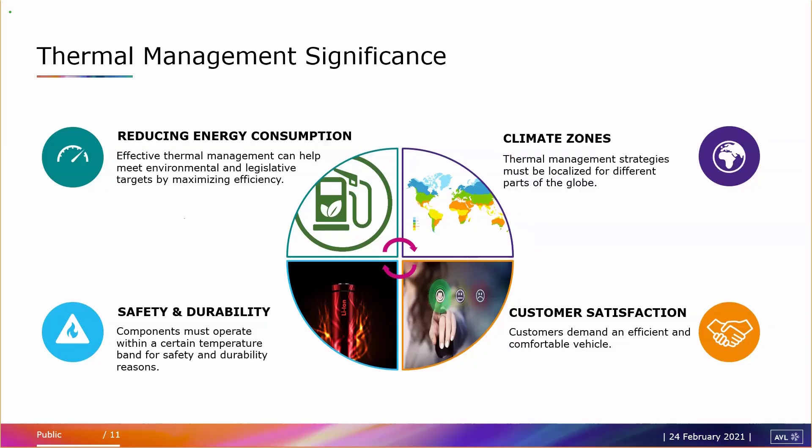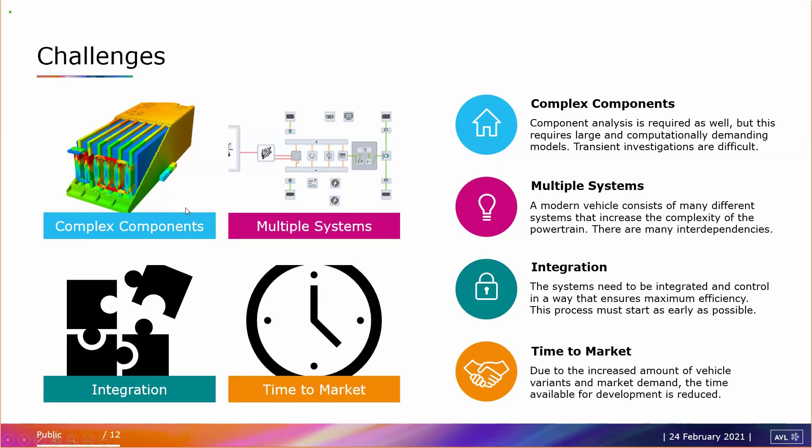So what are some of the challenges that we are facing when we are developing a thermal management system? First of all, the components that are part of the powertrain system are very, very complex. This means that most of them have to be analyzed not only in a system level, but also in a component level, which usually requires very complicated experimental setups or very complicated simulation models. This means that in the three-dimensional and testing environment, transient investigations are very difficult or very expensive.

Another problem is that a modern powertrain is quite complex. So there are many more systems in the vehicle than there used to be 20 years ago. Just compare, for example, a 30-year-old car to a modern hybrid. There are many more systems in a modern car. And of course, this means that we have to take care about the integration of these systems.

Only a completely and optimally integrated multitude of systems will operate at maximum efficiency, and this means that we have to take care of the integration as early in the development process as possible. Only this way we will end up with a satisfactory result.

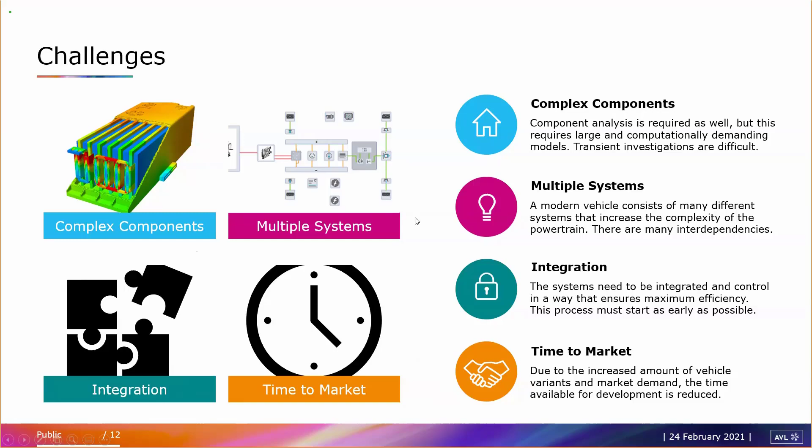And last but not least, due to the increased amount of vehicle variants that OEMs are producing nowadays, also the time to market is constantly being reduced. This means that we have to, of course, rely on simulation and perform some of the development already in the virtual environment. Let's have a quick look at the typical thermal development process.

So in the first step, we have to come up with a list of requirements. So we have to ask ourselves questions such as, what will the vehicle be used for? So for example, the application of a high performance car and a pickup truck will be severely different. And this also means that we have to define the use cases where the vehicle will be used.

So for example, if you're driving at a low velocity, towing a trailer uphill, you will only have a limited amount of cooling air available as compared to, for example, a vehicle that will be used to drive fast around the track. So the boundary conditions here are completely different.

We also need to take care of the powertrain topology. So we have to know which components will require active cooling, active heating, and this way we can come up, of course, with a list of components that need cooling, with a list of components that we need to purchase and integrate into our system. And last but not least, we also need to take care of the climate conditions. So we should have in this first step a list of thermal requirements.

In the next step, we try to develop a concept of our thermal management system where we evaluate different topologies. So we basically have to come up with a system that fulfills the conditions imposed onto us by the design team. So maybe some concepts would work, but due to packaging issues, you must change them, you must modify them. Here you can also already size the components.

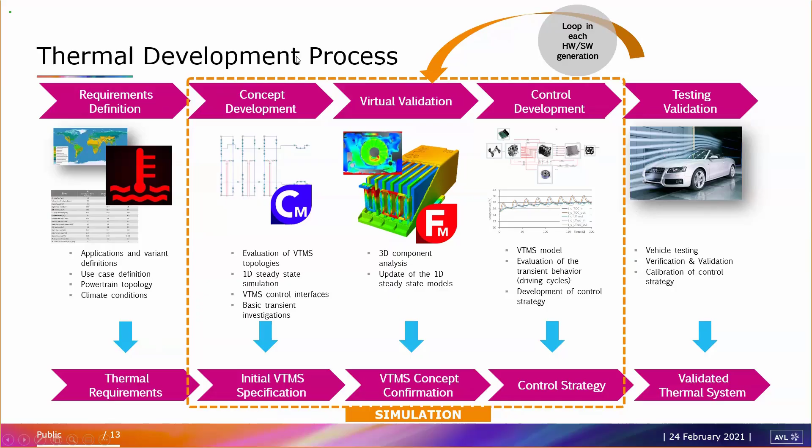But the bottom line is that the simulation, at least in these three central and integral steps of the thermal development, is a very good asset. So you can save a lot of time, you can save a lot of money, and most of the development can be front-loaded, so you can perform it much earlier in the development process and you don't have to wait for the prototypes.

Next, let's have a look at some types of simulation that are available and that can help us in the thermal development process. So generally, we distinguish between two types of simulation here. The first one being the component simulation. So these are various CFD and FEM codes. They're highly accurate, but since we are here really dealing with very complex geometry that requires very large meshes, they're very computationally demanding because of that.

And for that reason, one has to be very careful when devising a simulation plan. So most of these components are too complex to be really investigated in transient operation, and in order to have a good coverage of the simulation plan, you need to very carefully define the steady state points that you're planning to investigate. But they are very suited for detailed component investigations so that you can, for example, identify hotspots in some parts of the components and so on.

On the other hand, we have system simulation, which is very tailored for system integration and optimization. So you have a much lesser physical complexity of the models that you use here. This, of course, means they are much faster. Most of them will run under real-time factor 1, so they are faster than real-time, at least in most cases, which means that the simulation times are really much, much shorter than in component simulation. So here you can run tests that are several hours long in one afternoon, or even several scenarios such as that overnight.

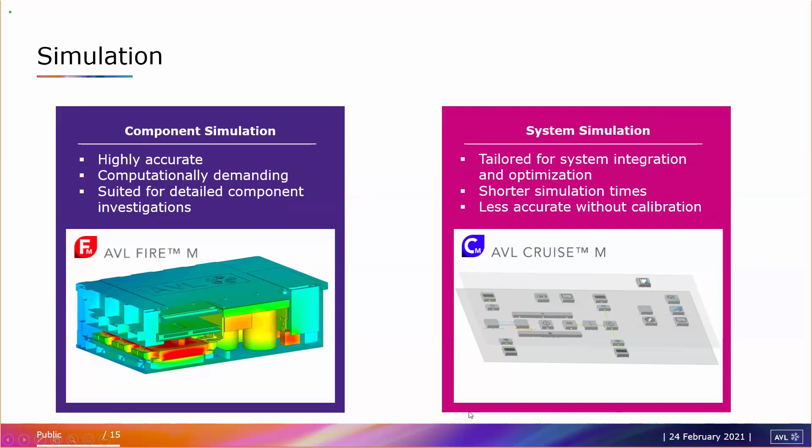And in this webinar, I would like to talk you through a use case that we've developed in AVL CRUISE M, which is our system simulation code. And the use case will be addressing a battery electric vehicle VTMS simulation. So if we think of a typical battery electric vehicle nowadays, there are several systems that we need to consider if we want to get a clear overview of the thermal behavior of the vehicle.

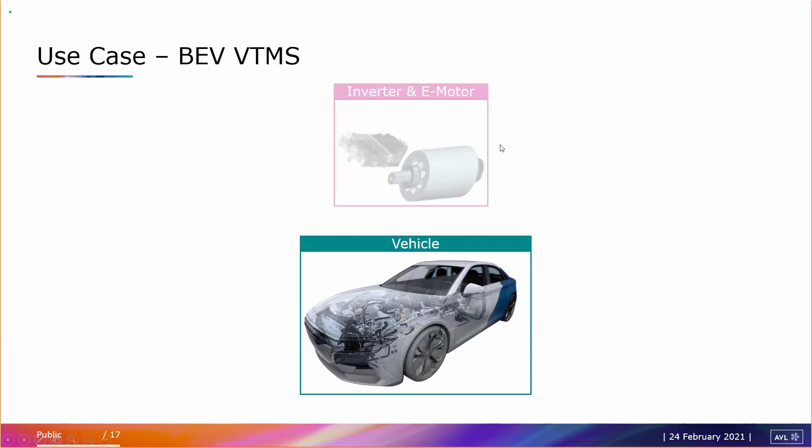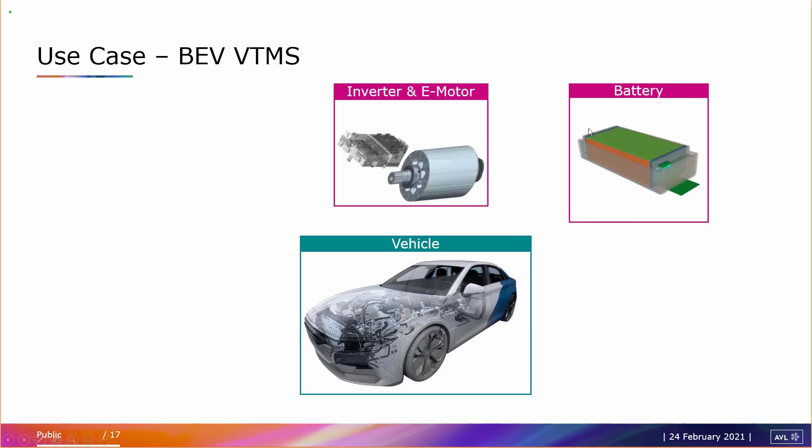We have the electric motor, so this is kind of the core component. Of course, it comes with an inverter and also some other power electronics. The battery is also a very important component in a battery electric vehicle. And these components require some kind of cooling. So usually we have liquid cooling, but it could be air cooling. And very typically, this is also assisted by the refrigeration cycle.

So we have the air conditioning system, which of course can also assist the cooling. So I'm talking about battery chillers. This can also work as a heat pump, so it's also a very important system that we need to consider in this day and age.

Finally, we also have to take care of the cabin in the vehicle model, if nothing else. So maybe if we're not really planning on doing a very detailed HVAC study, we need to at least consider the power load on the refrigeration compressor and other auxiliaries here. So this is also one of the systems that should not be neglected.

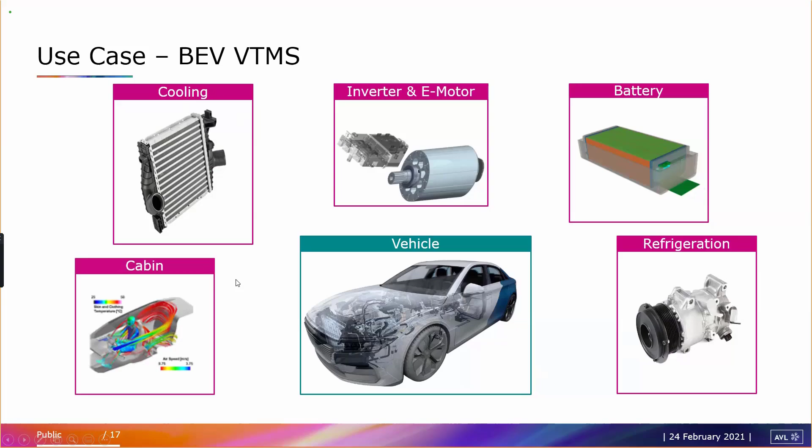And in the next slide, I would like to present briefly such a model in CRUISE M. There are too many details in this model, so I will just present some basic interactions and some highlights. But of course, there is a webinar series on the AVL website where some of these systems are explained in more detail that you can look up on the website in case you're interested.

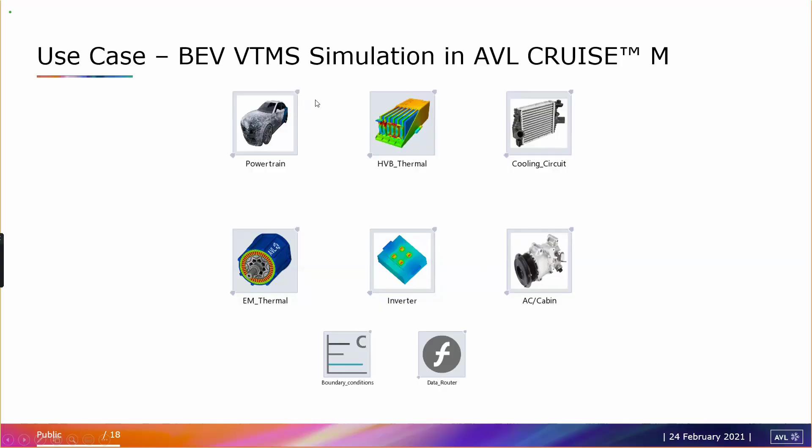So this is one of the installation models we have in CRUISE M, and our users can have a look at it. And let me now guide you through the model quickly. So first of all, we have the powertrain. This is the core of the model. In here we define the drive cycle, we define the driver parameters, we define the transmission ratios and losses, the vehicle dimensions, the wheelbase, and similar things. So this is really the core component.

And in it, of course, we also have the electric machine, the battery, and the inverter characterization. We also need to consider the thermal model of the battery. So the battery pack, as we all know, is huge, and also one of the most interesting components when we are talking about thermal investigations in an electrified powertrain. We also have the electric machine thermal model, and we have the inverter thermal model.

So all of these systems, the battery, the electric motor, and the inverter, they are all just lumped masses networks. So they're simplified accumulative models that we use to investigate the heat transfer phenomena in the vehicle. As already mentioned, these components require cooling, and this is done with a cooling circuit. So in here we model the flow of the water glycol mixture, and we also have a subsystem where we consider the air conditioning, and we also calculate the cabin temperature here.

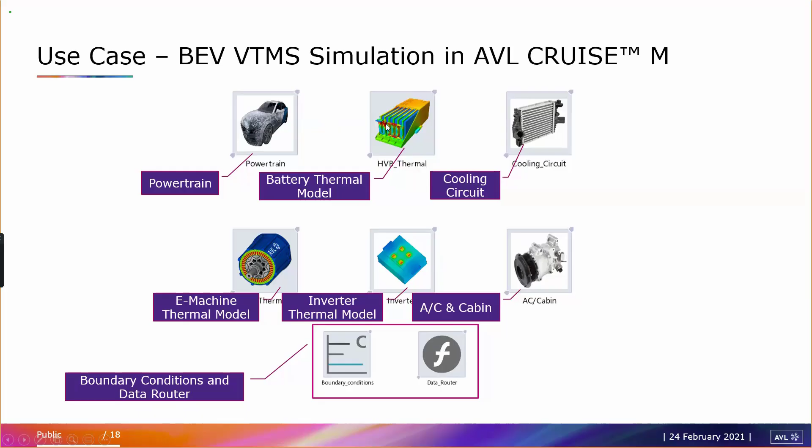At the bottom here we have two components. One is called the boundary conditions, and in this component we basically define the ambient temperature, ambient pressure, ambient humidity. So basically things that provide the ambient conditions, which will of course also have an impact on the thermal behavior of the vehicle. And we have the data router. This is simply a component that we use as some kind of a signal hub that sends information or signal buses from one subsystem to the other.

So I will now briefly present some of the basic interactions in the model. As already mentioned, in the powertrain, we also have the parameterization of the battery pack characteristic, of the inverter characteristic, and of the electric machine characteristic. And based on the operating point of these components and the temperature of these components, we will receive some kind of a power loss that we can pretty much directly translate into heat loss for, first of all, the battery, then for the electric machine, and also for the inverter.

And the thermal models of these components will then calculate the temperature of these components. And this is something that we are sending back to the powertrain model. And these are then the temperatures that are used to determine the battery power loss, the electric machine power loss, and the inverter power loss. So it's kind of a closed loop system here.

On the other hand, of course, we need to provide some kind of active cooling to the battery, to the electric machine, and to the inverter. And this is done in the cooling circuit. So in the cooling circuit here, we basically only simulate the flow network of the water glycol mixture. Of course, we also have the pumps. We have several different valves modeled, and there is also the cooling package.

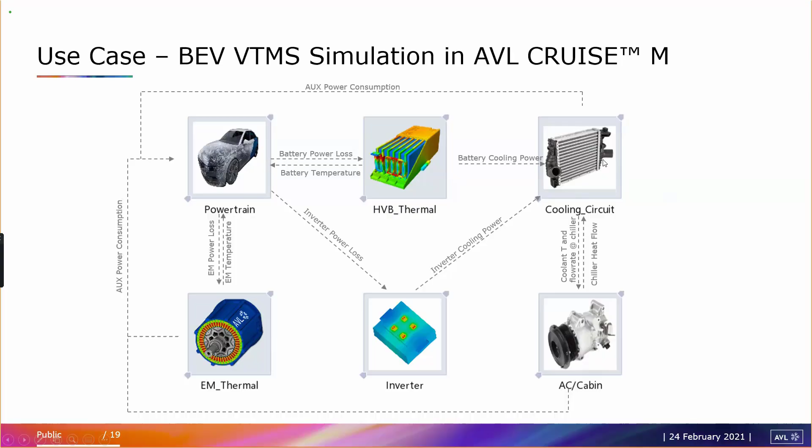Now, as mentioned, there's not time to go into too much detail here, so I would just like to show some highlights of this model. And first, I'd like to present the cooling package. So the cooling package is basically a component that we've developed to enable the user to simulate the overlap of various heat exchangers.

So this is quite a typical constellation in any type of vehicle, really. Usually you have several overlapping heat exchangers in the front of the vehicle. So you can have, for example, an air conditioning condenser. Then you maybe have some kind of an intercooler, and you also have the main radiator. And this is an assembly that can be modeled in this cooling package component. And the airflow in it can be considered either as a mass flow or as velocity.

So if you have some kind of CFD data available of the cooling package, you can simply map the velocity field in the shape of a 2D map. Segmentation is defined by the user. So if we have a look at this image here, when we see these full and dotted lines, these are various cells in the heat exchanger that you can consider, and you get some average results for each of these segments. But of course, this is arbitrarily definable.

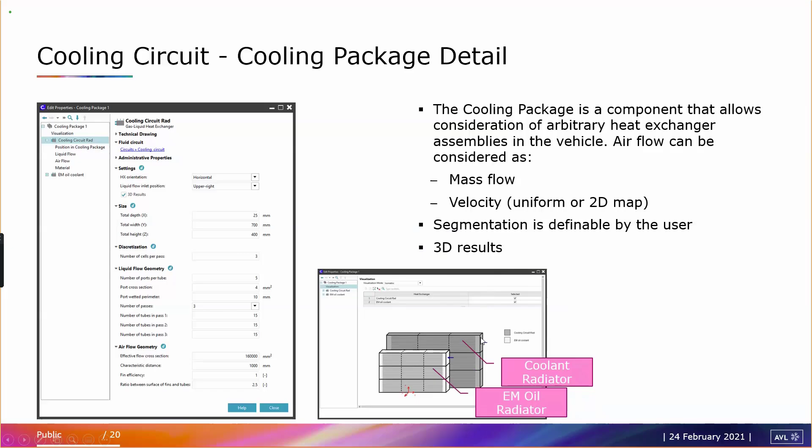We also output 3D results, so you can have a look at that in a more interactive way, which is of course much clearer than simply looking at a bunch of curves for each of these segments. Now this is a feature that is very handy and helps you spot some issues with the design in the concept phase where maybe you don't have any CFD data, or when you're really trying to investigate if what you have in mind would work at all. Of course, you can later parameterize it with actual data that you have, but this is especially useful in the concept phase. I would now maybe give you a short online demo of this component.

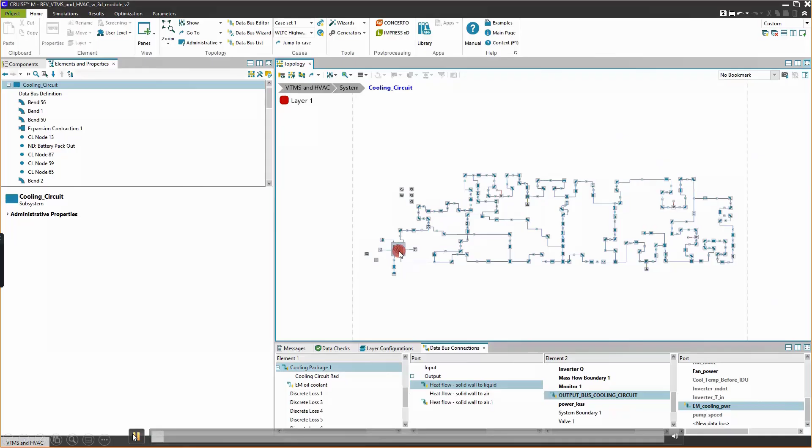So here we are in the cooling circuit. This is what I've previously already mentioned. This is where you calculate the flow and temperature of the coolant mixture. And this is then the component. It's part of the cooling system model as mentioned, and you can choose between the mass flow and velocity definition. There's also a neat visualization that helps you understand the heat exchanger.

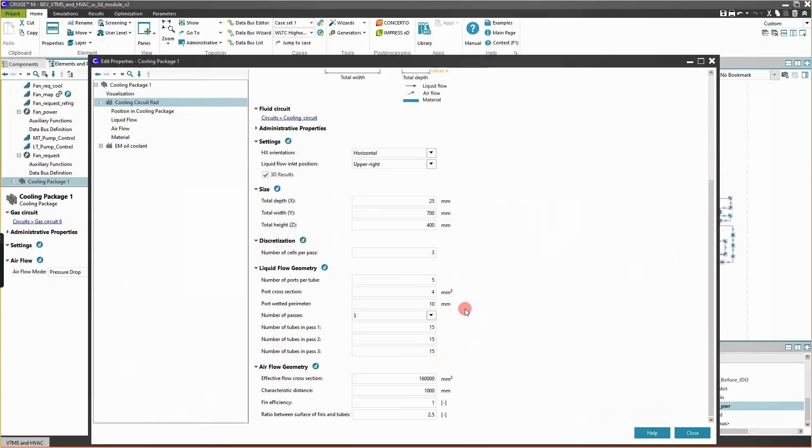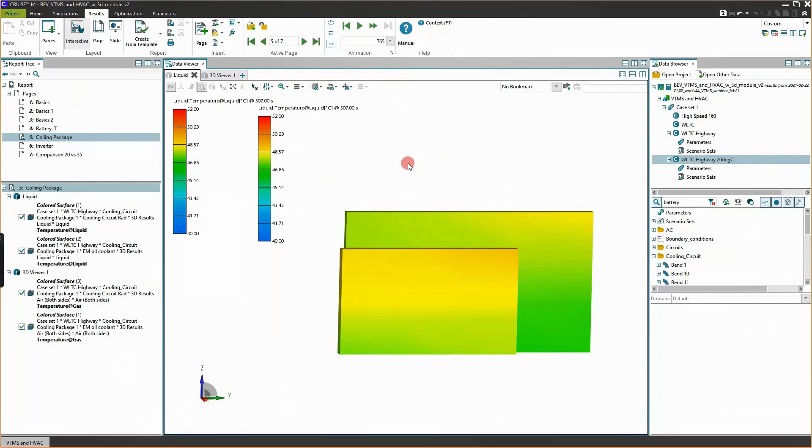We have the technical drawing that will guide you through the process of parameterizing the components. So you basically have to define the geometry of the heat exchanger, and you need to take care of the friction data for the air and coolant. As mentioned, there are also 3D results, and after the simulation, you can then have a look, for example, at the temperature distribution in the liquid. Okay, so this was a brief overview of the cooling package, and next up, I would like to talk you through the details of the battery pack thermal model.

And the nice thing in CRUISE M is that you only have to do this once. So you can model only one module, and the rest you can simply copy as a link. And if you then apply changes to the first module, this will automatically also be reflected in the rest.

And in return to the cooling system, we simply provide the sum of the heat flows that occur between the individual battery modules and the coolant passing through them. So this way we can then calculate the outlet coolant temperature from the battery pack also in the coolant system model. And of course, we also consider some convective heat transfer to the ambient.

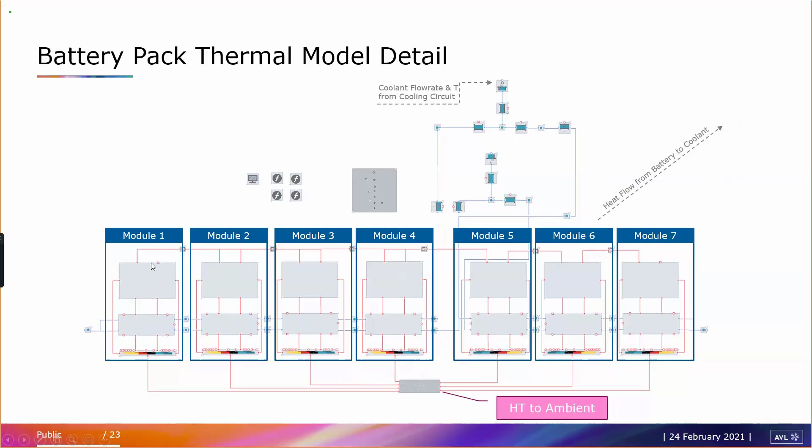Now let's have a look at the details of a single battery module. We have, as already mentioned, the coolant inlet and the coolant outlet. So this is a segment of the cooling plate that applies to a single battery module. And this is then, of course, connected to a segment of the housing. So this is where the cooling actually happens.

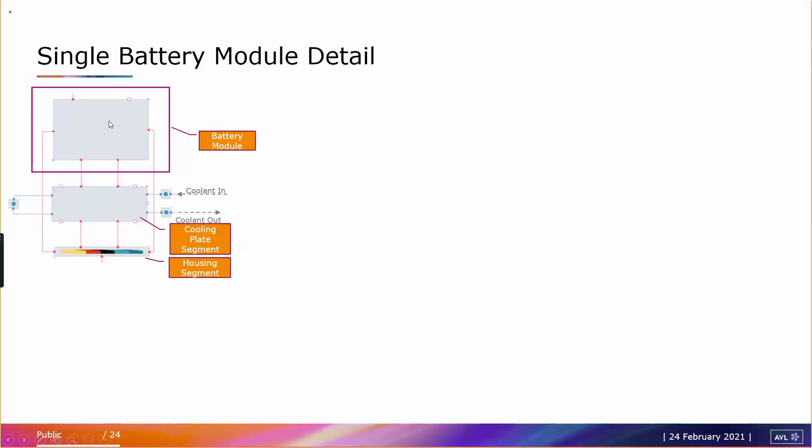Also, this battery module is a subsystem. Let's have a look at some of the details here. This is what it looks like inside. This is the battery cell, but I will talk about it a little bit later. On top, we have the bus bars, which are represented by a couple of lumped masses. These are used to calculate the temperature depending on the sum of all heat flows coming in through the thermal ports. We have the end plates of the battery module here and here.

And here on the bottom, we have the heat transfer to the cooling plate. So the connections that we see here on the left are connected to this part here. This is where most of the cooling of the battery actually happens, as we will also clearly see later on. The battery cells or the battery module are represented with a three-dimensional discretized solid.

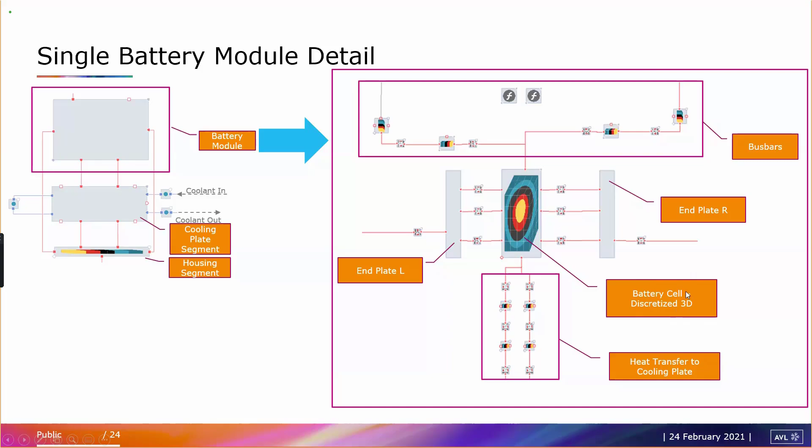And I would like to now talk about this component. It's basically a freely definable component that is used to simplify the process of building thermal networks of batteries. So imagine you have a battery module that includes dozens of cells, and if you wanted to consider each of the cells or at least groups of cells individually, you would have to construct quite a monstrous thermal network consisting of dozens of solid masses or lumped masses and even more thermal connections. And this component simplifies this process.

So it's a component that you can use, especially for geometries such as the battery module or a battery cell, to simply discretize it into several smaller cells. And these cells will then automatically take care of the heat transfer between them. And the nice thing is that you can freely define the size of these cells. You can arbitrarily define heat ports and heat sources.

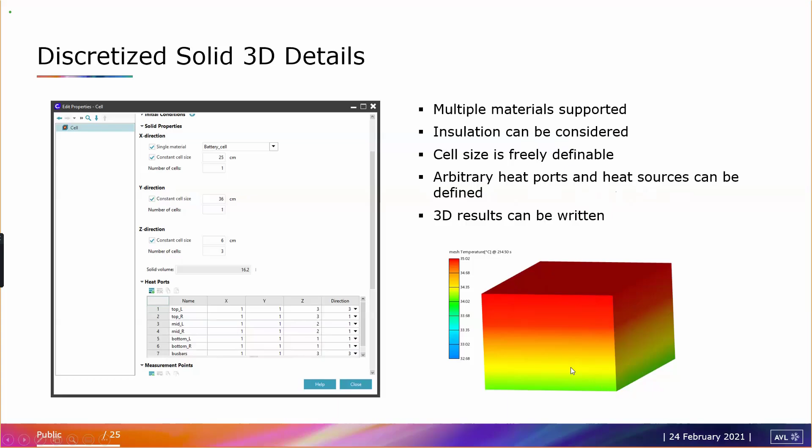You can consider insulation, and 3D results can of course also be written. And then you can really get a nice overview of what's happening thermally in the component. So again, I would like to show you an online demo of the component.

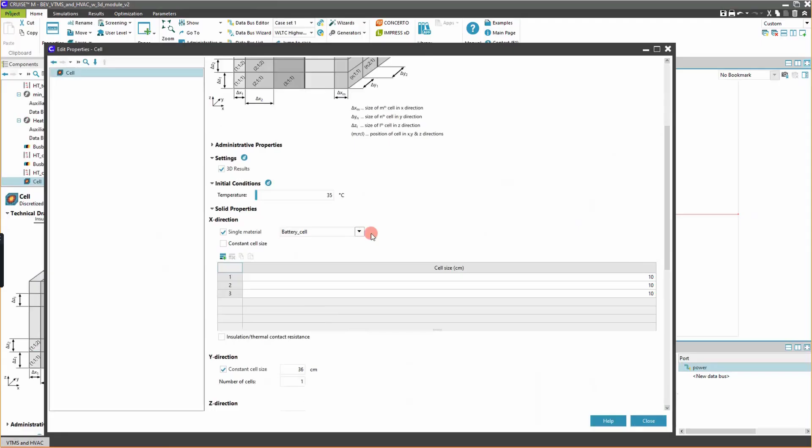So that's the component. And again, we have a tech drawing that's helping us understand what it is we're doing. And as mentioned, you can choose different materials. You can even define your own. The cell size can be constant or not. And you can even consider heat contact or heat resistance between the contacts.

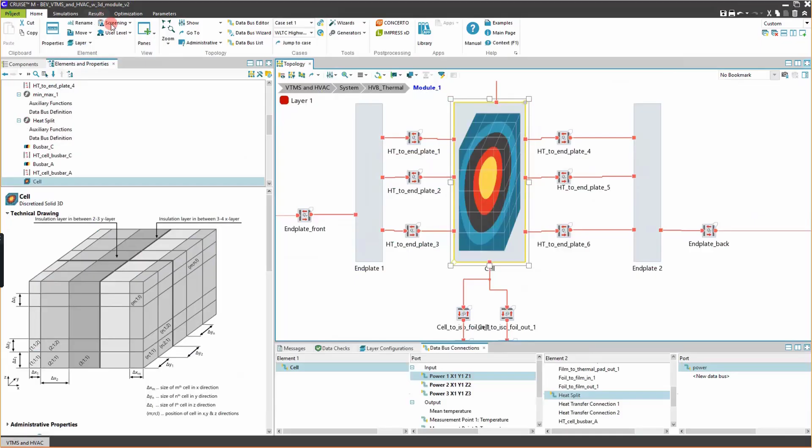Arbitrarily, you can define heat ports, measurement points, and external power sources. So these are the heat ports that we have previously defined. You can use them to connect the component. And in the end, we also, of course, get some kind of a 3D result, and we can plot this result for any time step in the transient simulation.

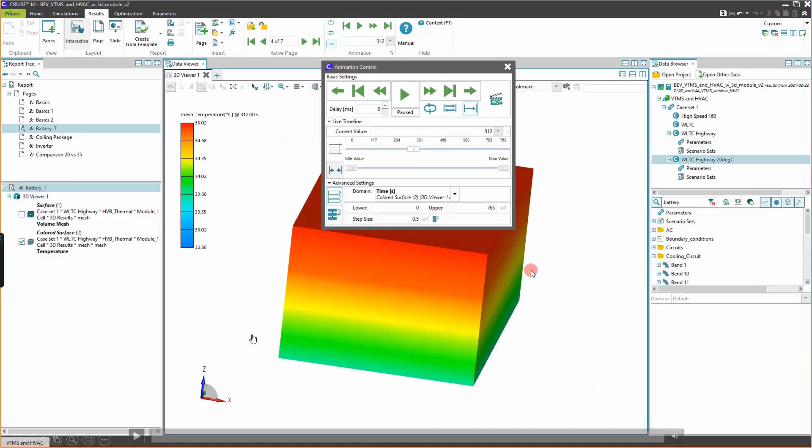And by looking at this green color here, of course, we can clearly see that the cooling plate here is mounted to the bottom of the component, as we've previously already seen. Okay. So that was the discretized solid and the battery modeling approach. And one of the components that also needs to be considered is, of course, the inverter.

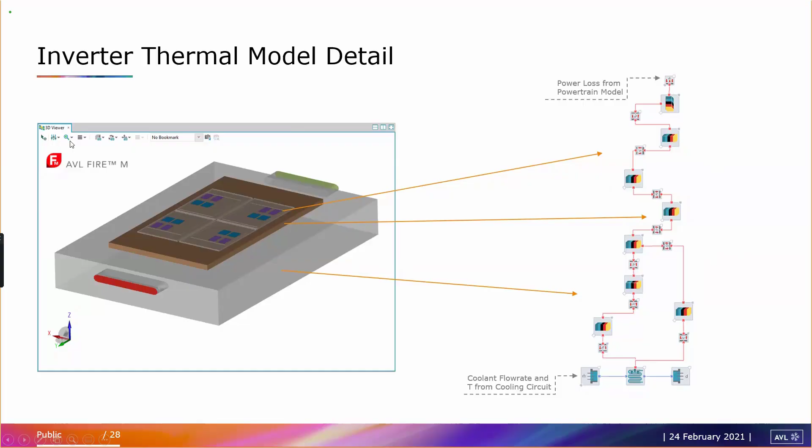So we're receiving signals from the cooling circuit, and of course then we are bringing the heat flow back in order to calculate the outlet temperature of the coolant. And in this model here, we can then get a comprehensive overview of the temperatures in the inverter. Now, of course, you might wonder what's the easiest way to transition from this model to this model. And with our software solution, it's very easy.

We have a feature that's called the thermal network generator, and it allows us to transition from 3D to 1D or 0D physics-based modeling pretty much automatically. So considering there is already a three-dimensional model available, you can use AVL FIRE M. So this is our CFD code. You can use it to perform a thermal investigation of the component in question.

You can choose different selections in FIRE M, and these are certain parts of the geometry. You can specify also the heat transfer connections between several parts of the component, and FIRE M will then automatically identify these components, connections, and also material properties. And here I'm talking also about, for example, the coolant flow rate, the initial temperatures, the material properties, and so on.

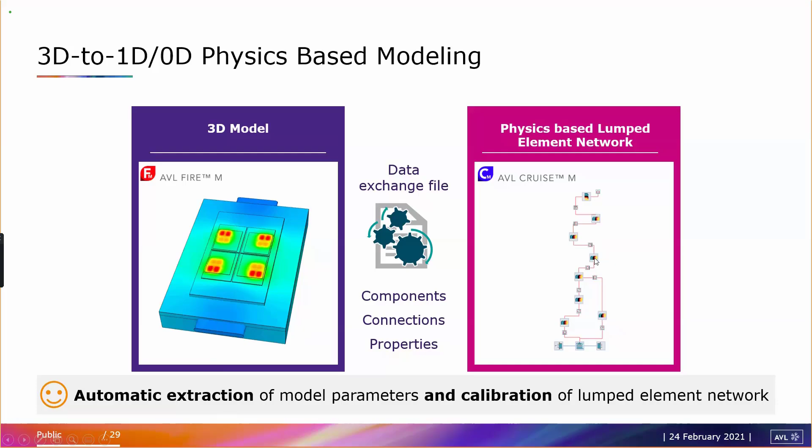And it will then automatically, it really takes only a couple of clicks, generate a data exchange file that you can then automatically import into CRUISE M and generate such a model. So most of this process is automated, and the model you end up with will be calibrated. This means that it will give pretty much the same results as the one that Fire will give. So of course there will be some discrepancies, but they're very, very small.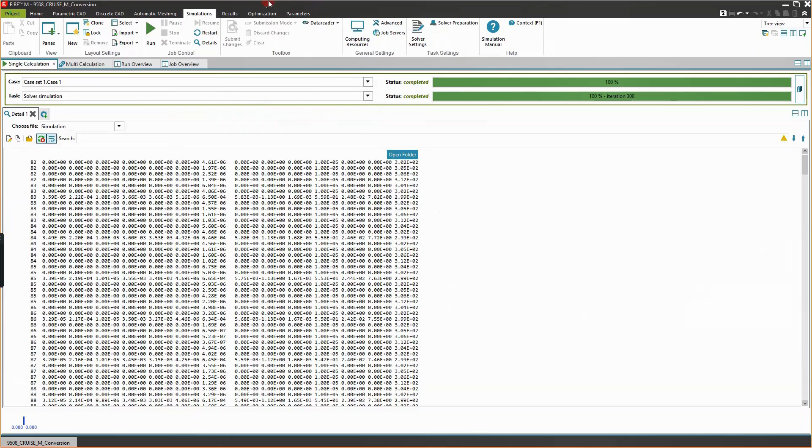Again, I would like to show the simplicity of this solution in an online demo. So here we are in FireM, where we can activate the generation of this file by simply loading the global formula. And after the simulation is completed, based on the available results, we will generate the previously mentioned file. And in CRUISE M then, by using the thermal network generator, we can simply load this file.

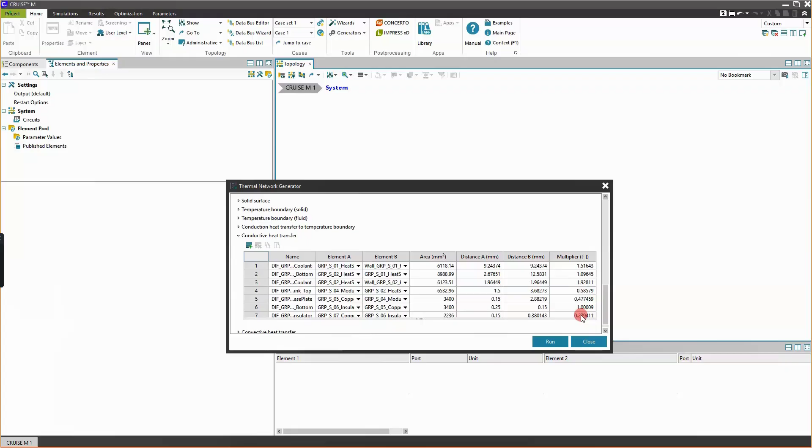And you can inspect what's being imported, so the liquid properties, the solid properties. You can, for example, add arbitrary heat flow sources, change the material, or change the mass of the component. You can also inspect heat transfer data and even change it. And after clicking on Run, the model will then appear within a couple of seconds. And this is then the model that you can pretty much use and integrate into the system simulation model. So in the system simulation model, what are some of the results that we end up with?

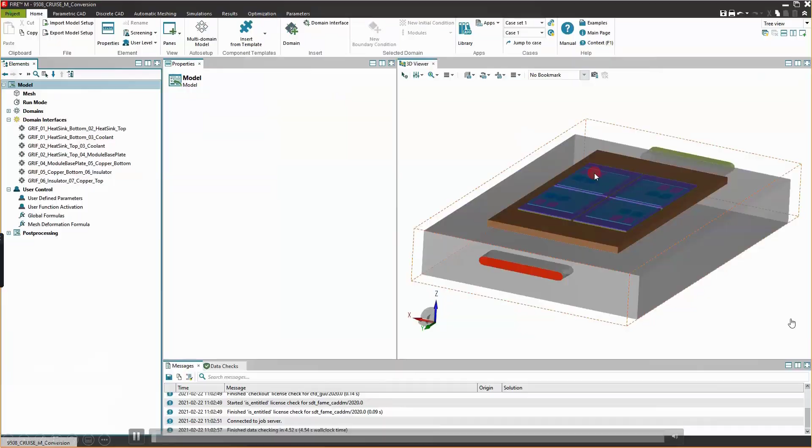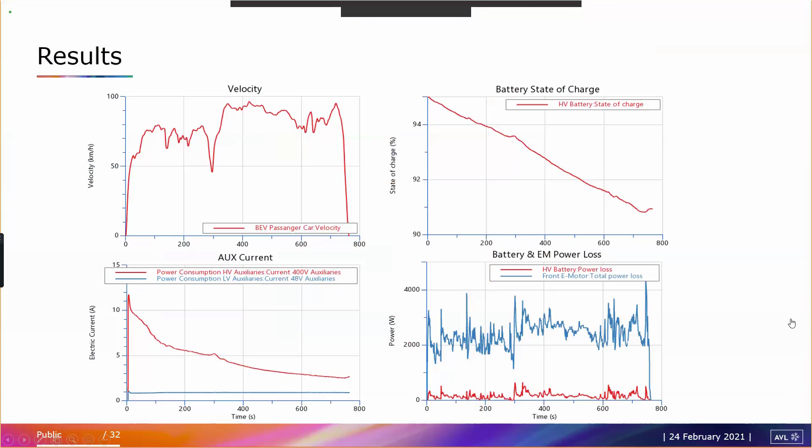And of course, our main heat sources for the thermal management system are the battery and the electric machine. And we can have a look at the power loss of both of these components as well. And we can see, of course, that for the electric machine, the peak power losses here pretty much correspond to the acceleration phases that occur in the drive cycle.

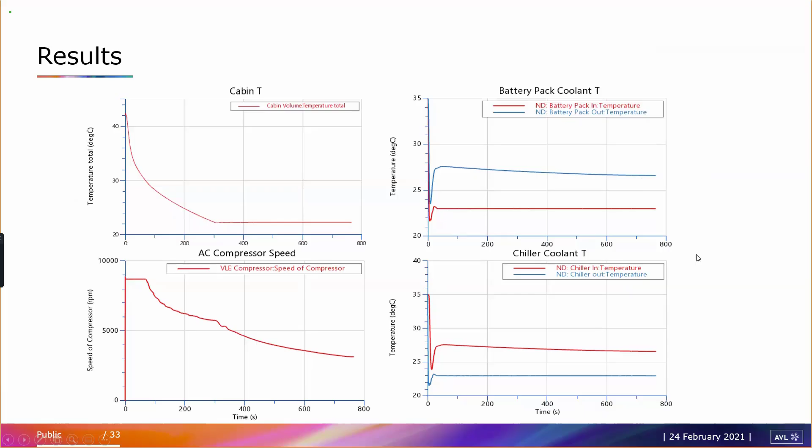So this slowly brings us to the end of this webinar, and I would like to wrap things up with a summary. We can all agree that thermal management is a key topic in vehicle development, and especially in xEVs, optimal integration of all of the systems on board the vehicle is especially crucial. And supported by simulation tools, the integration process can be started already in the concept phase. And AVL simulation solutions, of course, simplify the consideration of some powertrain components in the system simulation.

So you no longer have to lean on experimental data and 3D data. You have components that assist you in performing such investigations, such as the demonstrated cooling package, the discretized 3D solid that you can use especially for the battery or some other similar components where you are dealing with a large thermal mass. And we also have the automated 3D to 1D transition. This is especially handy when you already have three-dimensional models of your components available.

And all of these solutions together, for example with our 3D code, so with FireM, not only system simulation solutions, they're available as one package called the AVL E-Suite. So this is really something that you should look into if this webinar was interesting for you.